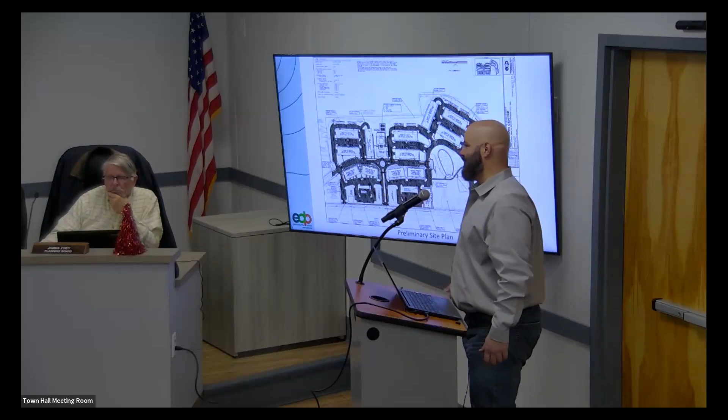I just wanted to identify one additional comment we heard earlier today related to the density on the site. We're at 507 units. We had a building identified as a 4-story building that is always going to be a 3-story building in this location, which gives us that 507. When they did the count looking at all the buildings, that would have brought us to 520. We're not intending 520, we're intending the 507. That allows this building closest to the street to be a 3-story building, bringing the mass and scale down from the 4-story buildings in the back to a 3-story building in front, consistent with the streetscape we've been providing. So just wanted to make sure that's clear and understood.

We've got a million slides, can go through whatever the town may want to see. But I know we are in the middle of a public hearing that was tabled from last evening, so if we can continue that and close that public hearing, we'd like to—if the board is ready—have the board take action on this application tonight and issue a final approval. Okay.

Does the board have any questions of Mr. Danable at this point? Ms. Biancani, do you have any comments for the board or anyone at this point?

Good evening, everyone. As Mr. Danable indicated, there's been a lot of information exchanged. The only outstanding comments—there were, I think, 3—and I'll just quickly run through them. One was the payment in lieu of recreation; there's been some back and forth with respect to that. And I believe the other change on the plans, and maybe Joe you can point it out, is that there are now pickleball courts on this site. Yes.

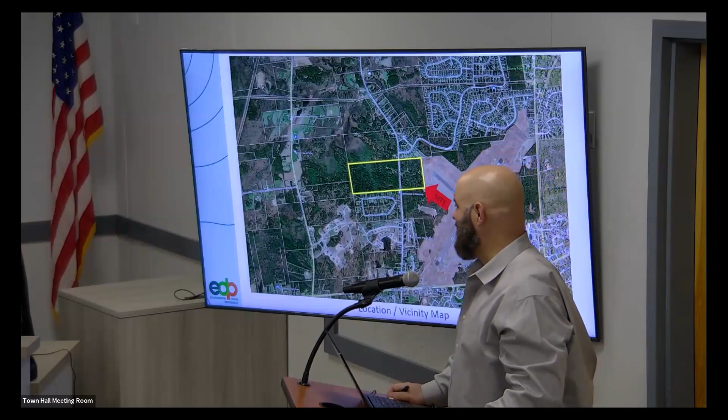We are looking to develop just the eastern side of the road located here. The western side of the road will be one of the 34 lots, and that will remain with the Cisar brothers, whose family has owned this for 50 plus years in the town of Milton.

We've obtained jurisdictional determinations from the New York State DEC for wetlands. We've obtained verification on endangered species from the New York State Department of Environmental Conservation. We've also obtained a letter of no impact or effect to cultural resources from OPRHP. In addition, we've received willingness to serve letters from Rowland's Hollow Waterworks and Heritage Springs Sewer Works.

At the last meeting, a round of comments asked us to provide engineering narratives related to the sewer and water. We have provided engineering narratives for sewer, water, and stormwater management on the site.

Again, the project itself is located on both sides of the road. The east side will be developed with 33 single-family lots plus other utility lots. The west side of the road will remain as one parcel retained by the original owners of the property.

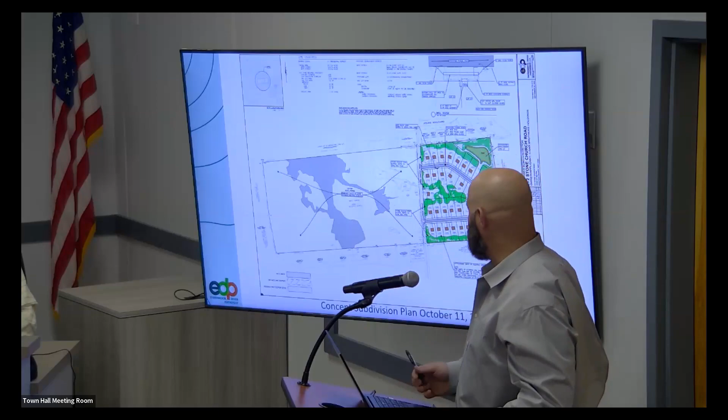Internal to the site, we have a proposed public road, Paulina Way, named after the brothers' mother, who was the original purchaser of this property. 33 lots are accessed from the public road and one access onto Stone Church Road.

We are providing a no-cut buffer or planted buffer along Stone Church Road, consistent with other subdivisions that have been approved on roads in the town of Milton.

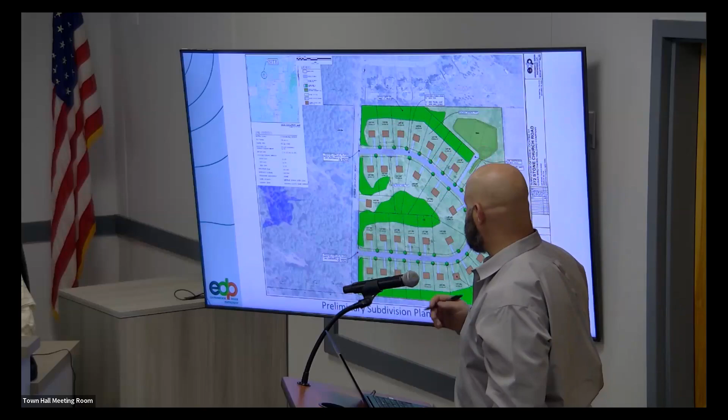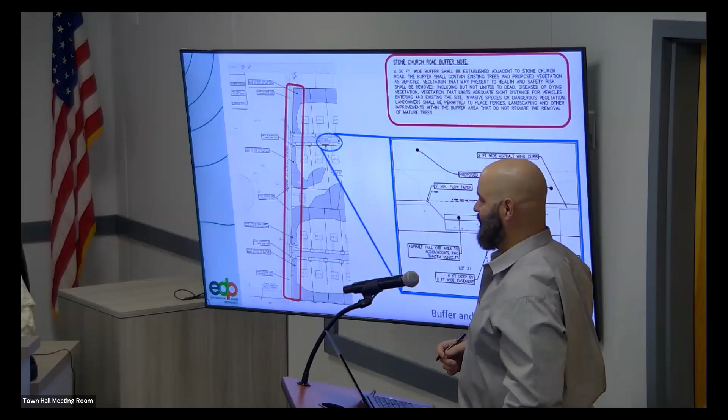We're providing a mail kiosk, with a buffer note along Stone Church Road, where we're going to maintain buffer areas where there's thin or no understory vegetation, and additional plantings will be placed. A mail kiosk located within the right of way, a pull-off, with two mail kiosk locations to provide access. This is identical to what was approved on Greenfield Avenue at 240 Greenfield Avenue for this setup.

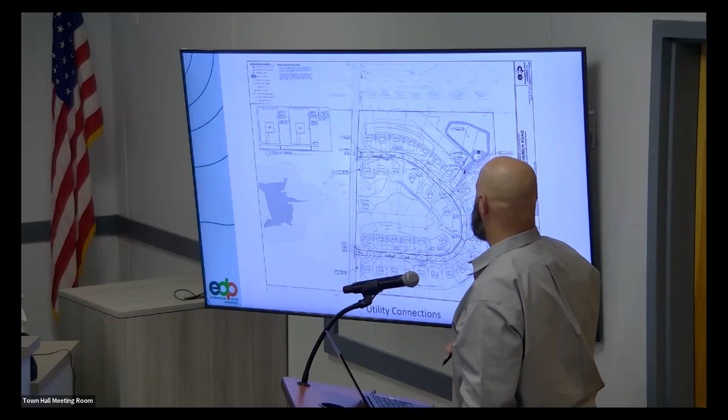The county also talked about this area here, which is within the runway protection zone, that 2-dimensional element. McFarland Johnson was the county's engineer for the airport.

No structures are allowed in the RPZ zone, and the county has the right to clear any and all vegetation obstructions at the ground level within the RPZ zone, and that is their right. I don't believe we can tell them no, we can't do that. I'm not sure the town even has the right to tell them no, they can't do that. That's within their 2-dimensional easements.

So that's why we believe that's the appropriate spot to put the stormwater management area. Now, they also had comments on the stormwater management area, they have to make sure it's not an attractant to birds and wildlife.

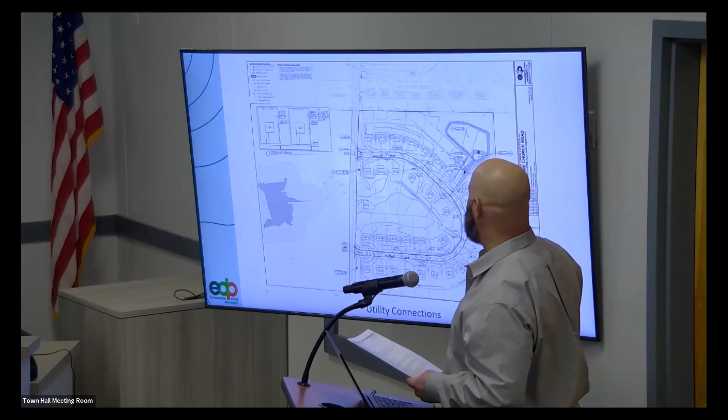The great thing about this site is we have some of the fastest infiltrating soils in the county at this location. All of these ponds, after a storm event, will be drained within 24 hours, so they won't be conducive to wildlife habitat and birds. Obviously, they're talking about bird strikes for planes flying off the runway. So we definitely wanted to provide the town with that update based upon the county recommendations we received.

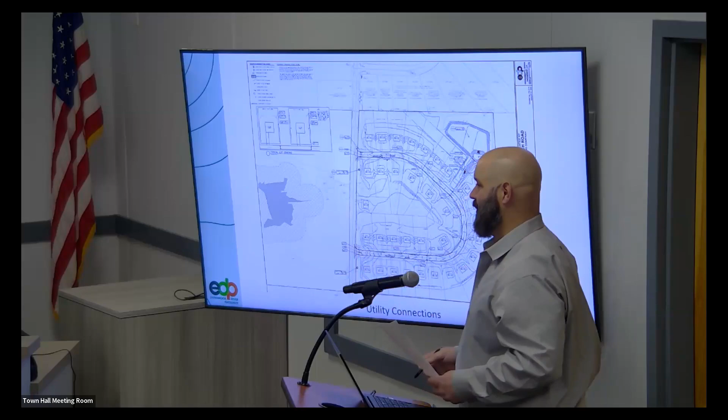Can you go, so you have trees that you're leaving there. We were proposing to leave some trees. The county has the right to come in and clear them, through an easement that they have.

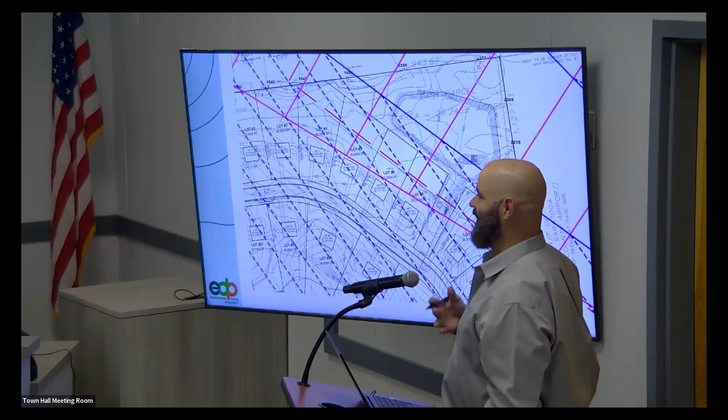Even then, those trees are going to be on those private residential lots. Correct, there's an easement. My understanding is the county airport has an easement over that land, not just here, but at the ends of all 4 runways, and has the right to do whatever is necessary within those areas. Which they obviously haven't to date. But correct.

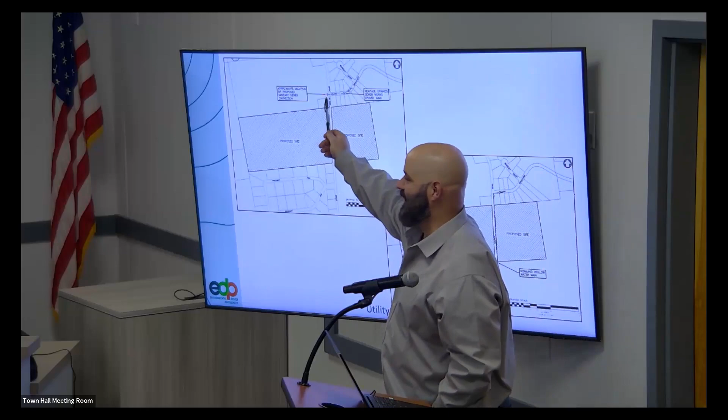So I think that's it. We had sewer, water. There's an existing Rowland water main running in front of our site. We're simply going to connect to that and loop it through our project. Sewer, there's an existing sewer main that exists as part of Athens Drive. We're going to run a force main up and tie into the manhole on the west side of the street, again in accordance with whatever sewer district and DEC standards we need to follow.

Okay. Oh, forgot about this one. Traffic - we had a traffic study done several years ago. We were looking at 100 units on this site as a part of the PUD.

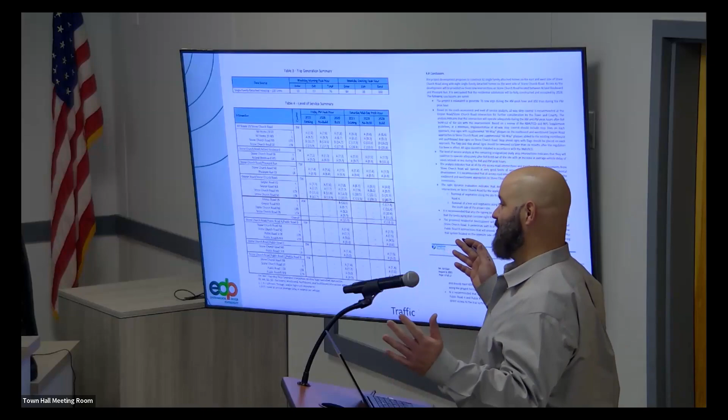The conclusions of that study recommended mitigation at the intersection of Stone Church Road and Geyser Road with the installation of a 4-way stop. So Geyser Road would become a 4-way stop. There was subsequently a county letter pursued by the town that recommended no mitigation, or that a 4-way stop was not warranted at that location - they had done an earlier study that said it wasn't.

So we have provided a supplemental study from our traffic engineer who keeps the same conclusion for the 34 lots, that a 4-way stop is recommended at that intersection, and that it is warranted today due to the high degree of right angle incidents that have occurred at that intersection. So we do have an instance where the county might not necessarily agree with the mitigation measures for this development.

The developer will put in the stop signs, or will not put in the stop signs - the developer cannot put in the stop signs if the county doesn't approve them. However, I believe the town board has the right to authorize the highway department by resolution to install those stop signs. So it's a little bit of a gray area like that.

We're willing to do the mitigation, we have no issue with it. I don't know how that's going to work out with the county. I think Sophia's already triggered that with both county planning and county DPW to say, all right, we've got to come to some consensus here. We've had our code enforcement and some of our EMS back up that that's one of our most dangerous intersections, and they're inclined to say let's go with it, but the county does control the intersection.

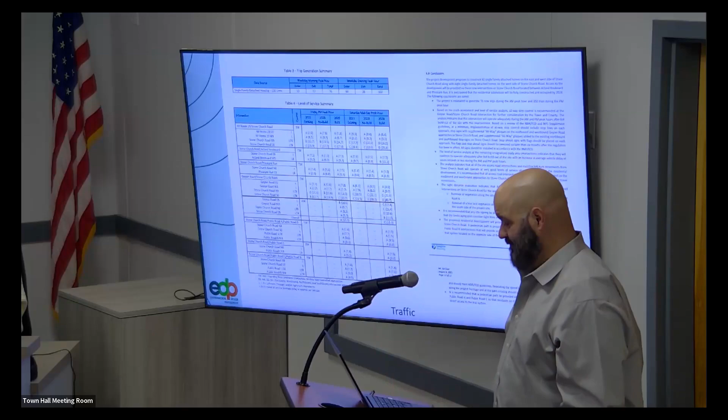Okay. Ms. Biancani and Ms. Marusa, do you guys have things you want to go over with us at this time?

Thank you. So not a lot to say in addition to what's already been said. We reviewed these plans. We did have some stormwater comments that have been addressed - they were pretty minor, this is a fairly straightforward site. We did request the details on the stormwater, the water, the sewer - that was all appropriate and accurate. Obviously this project will require all the approvals of Saratoga County and DEC and DOH.

And then the only other thing was the traffic study, and we appreciate the additional information. As the chairman indicated, Sophia has sent the traffic study to County DPW and County Planning for coordination so that we can understand what the issues are. And that was, I think, all we had.

Just to add to that, so we're waiting on that feedback. We've reached out directly to Chad Cook to get that determination. So while we're thinking about infrastructure, one of the details that came up in a discussion with our highway superintendent was with regard to maintenance and management of the mail kiosk area, especially as it pertains to the road dedication. He did express concern with including the mail kiosk and the paved surface approach area within the right of way, and expressed that he was not comfortable having that be part of the road dedication process. So it's not that the board needs to make a determination, but it is pertinent that the board be aware of the highway superintendent's comments on the project, considering if these roads will ultimately be town dedicated.

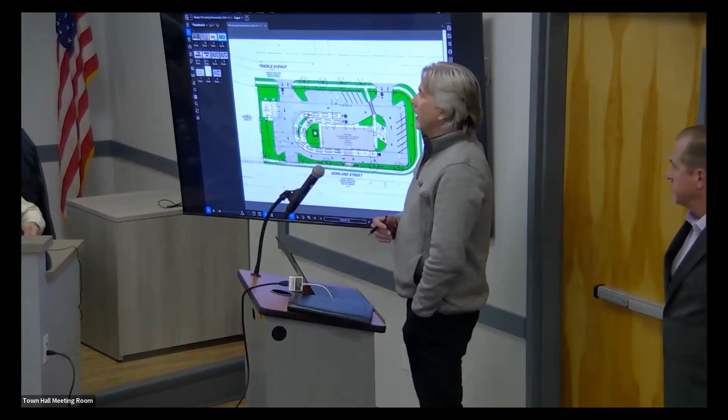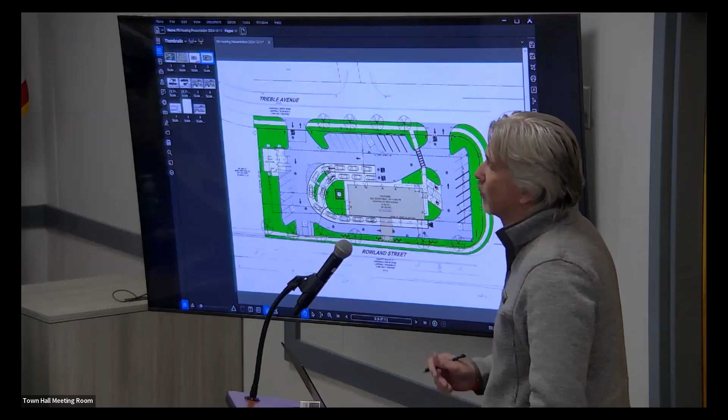Good evening, great to see you. We provided some updated figures, and this site plan is pretty much the same as it was last month—it was very preliminary last month and it's still a bit preliminary now. But we've enhanced some of the pedestrian features we discussed last month with this board, which included basically a book match to what Dunkin' did, with almost 360-degree pedestrian sidewalks, with a connection from the front of the McDonald's, which is now on this side of the building, connecting it to that sidewalk around the property as well.

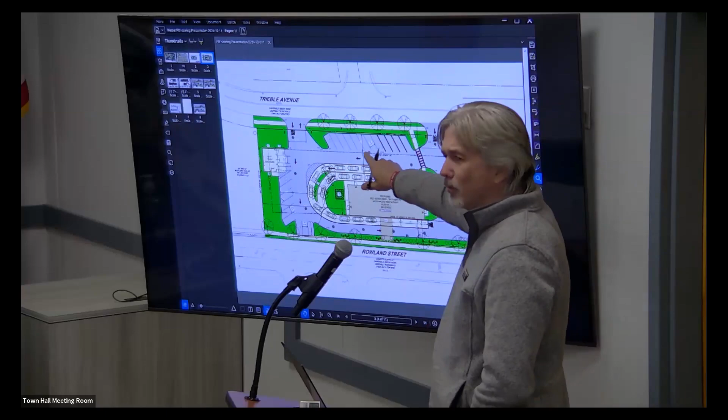I know there's a couple comments in staff's review. We need to get our drive aisle up to 21 feet—I think it's 2.5 feet short. When we get our full design drawings together, we can avoid that variance. At 21 feet, right, that's the minimum. Yeah, I think I can find that 2.5 feet or so somewhere in there and get it up to 21 feet and avoid that issue.

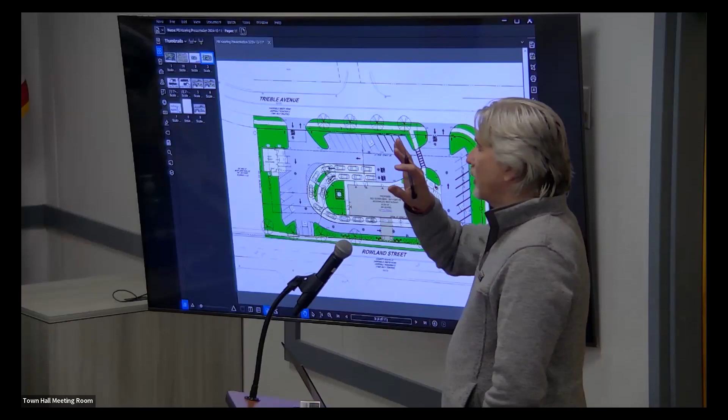So based on what we heard last month and these changes, I think we're kind of set with the site plan. I was going to jump to the architecture because I think that had a little bit more discussion needed, if that makes sense.

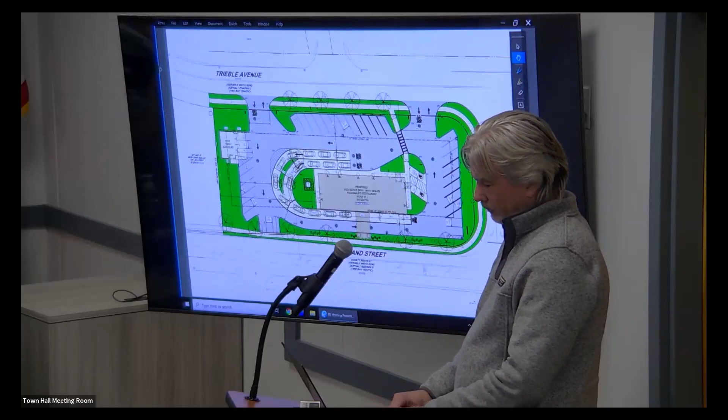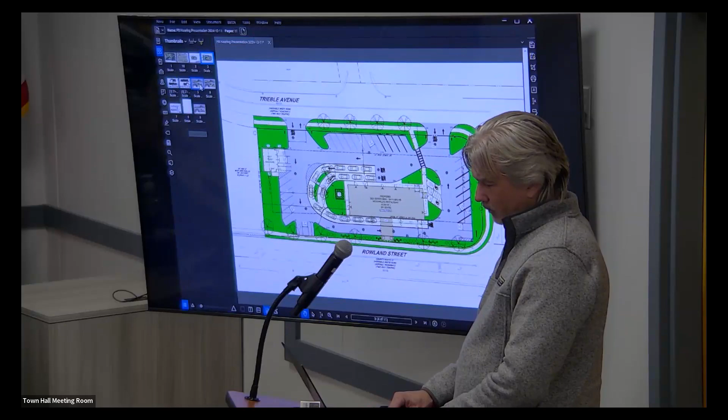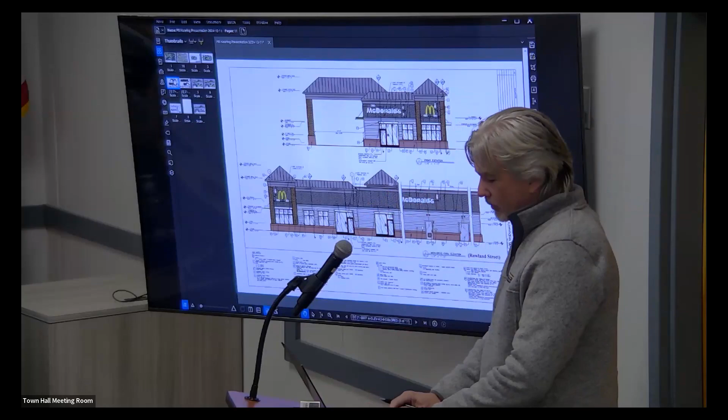In your packets was two-dimensional elevations that we prepared based on board feedback. I'll just jump to the 3D since those are a little bit easier to understand and follow. These weren't ready by the time we made the submission, but obviously we want to show them to you tonight. This gives you a sense, and the views are labeled.

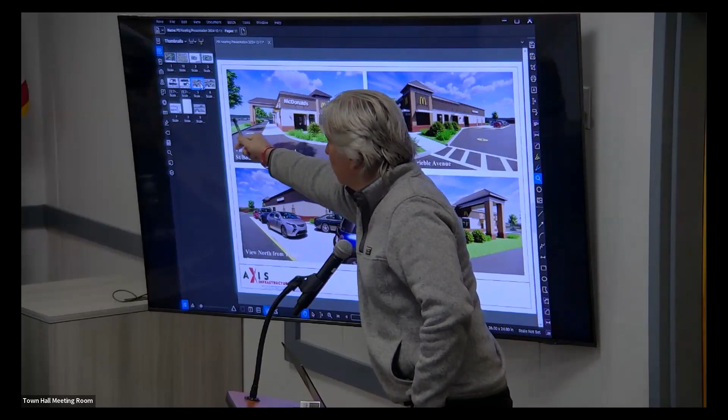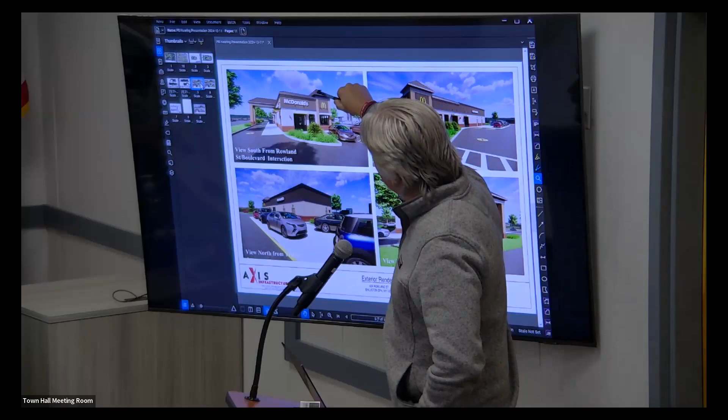So if I'm coming in up the boulevard and off of Rowland, looking down Rowland—this would be Rowland over here—you can see we've added the gable over the top of the cover over the drive-through area, again matching that Dunkin' Donuts next door to us, and provided in the front of the building kind of this architectural feature to really show this is the front of the building and this is where the entrance to McDonald's is, to try to capture that.

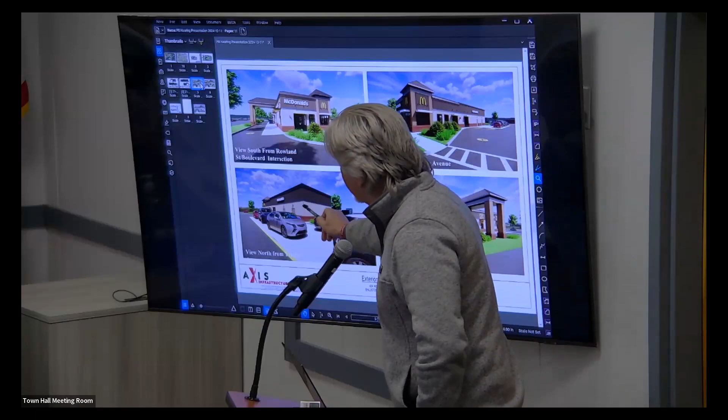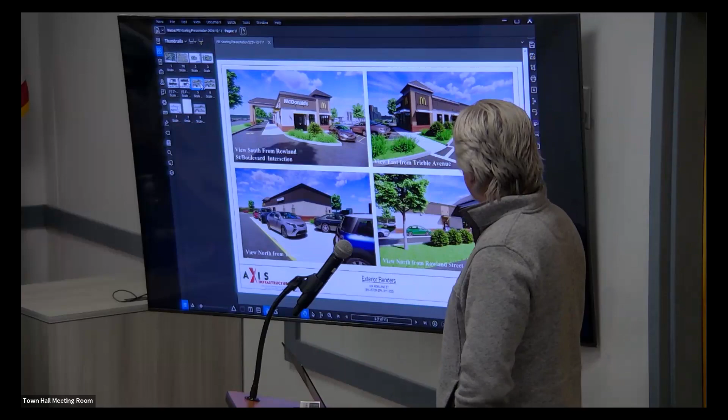Flipping around now, this is if I'm up at the Boulevard and Trieble, in that corner, looking east towards the building—it gives you the sense, here's the non-drive-through side of the building. Basically Hannaford would be over here, and down around here you're entering the drive-through. Dunkin' is basically down here. This is looking up Rowland Street to give you a sense of that view with the drive-through canopy and that gable on the front end, really making it a feature of the building.

We tried to hear you the best we can and capture a lot of the architectural features that you wanted in this building, and I'd like to think we have. I guess that's why we're here, to get this feedback tonight.

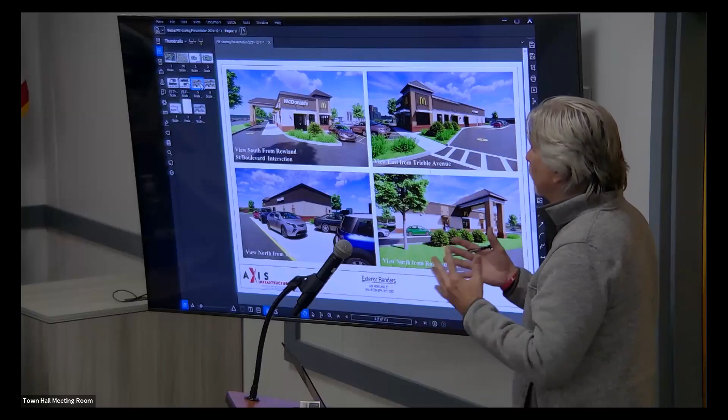We know there's much engineering comments to address. Our goal early on was to get the big picture items set, architecture and layout, and then we'll dive into stormwater pipes and all the nitty gritty of the project.

Ms. Marissa, do you have any comments? I had a quick question before I moved on, which is what is the height at the top of the canopy for the drive? The scale of the Rowland Street view north makes it look very large, but I can't tell if it's a matter of perspective. If we can clarify the dimension, that's great.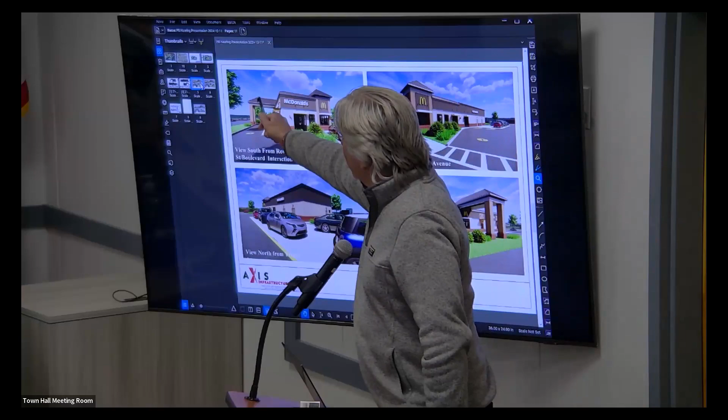You're saying, what's the top to there? Yeah. We're about 19 to the top of the parapet, so it's probably another 3 feet. I'd have to confirm it, but you're probably in that 22-ish range, 23.

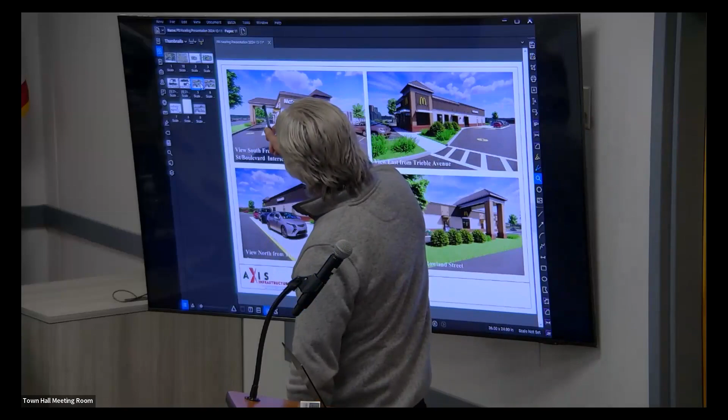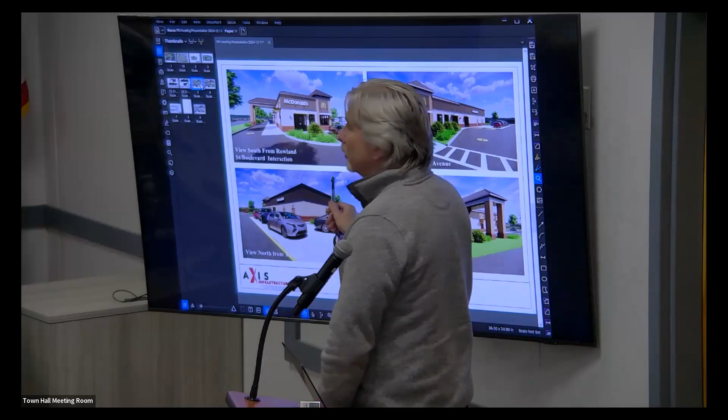So that ties into the parapet, because in the rendering you sent us, it was more of a flat roof. Well, that was the prior one. We have, around the canopy, around the front of the building and everything, that kind of mix of a real gable and a faux gable. On the backside of the building, we still have that flat, but we've enhanced the parapet with this detail here to avoid that flat roof look as much as possible.

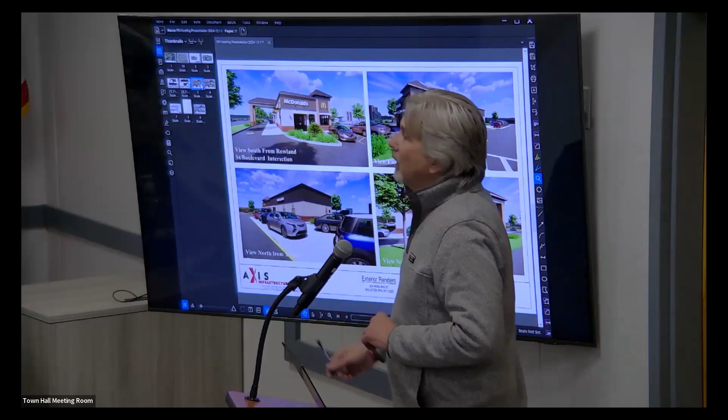Yes. Okay, all right. Anything else?

Thank you, Steve, for working with us through these renderings. I appreciate the fact that we've been able to coordinate offline and you're taking in comments from various parties. So we appreciate that, and hopefully we can get some clarity going forward tonight.

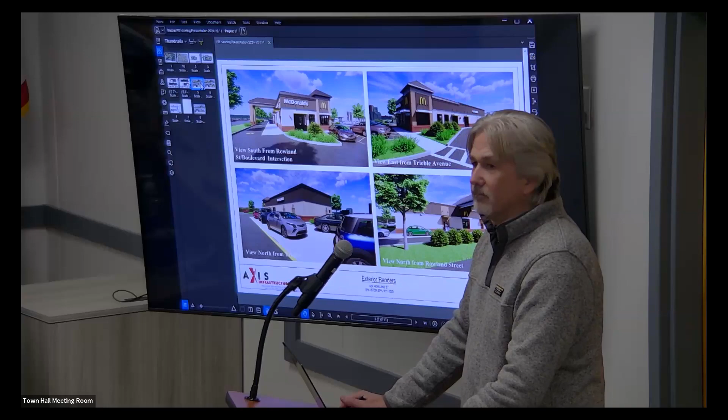To the same end that my initial review had stated, I think it's critical for the board to continue to assess the architecture of the building, to continue to make the asks and enhancements that they see required on this site in accordance with the town center guidelines at this time, and to really firm up the aesthetic review of the building.

Obviously, we addressed the proposed layout last meeting, we had looked at the alternatives, and I think that aside from the potential spatial variances that we might have to deal with, the layout itself looks like it's definitely far more pedestrian oriented.

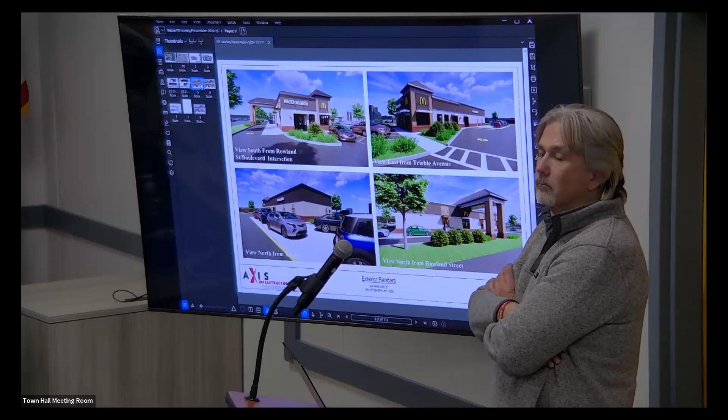The only thing I had a question about, and it could be a matter of engineering review, is if we can go to the site layout. I don't know from a traffic circulation perspective, if it makes sense to think about the entrance closest to the boulevard to Rowland. If in some way restricting turns there might help improve circulation of the site for those bypassing around and coming off of the Trieble Avenue southern entrance, where they have to hop into the kiosk by looping around the building. I don't know if there's any way that by regulating movement on site we could improve that, but obviously it has to still support adequate access and circulation.

It's just something I was trying to test drive this site and we were trying to anticipate the turn. So I just didn't know if that was something for us to look at a little bit more closely.

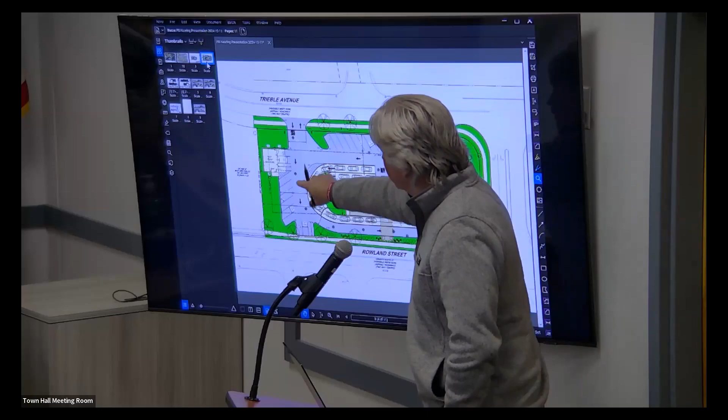Yeah, I guess, from a pedestrian standpoint, right now we have one-way traffic flow counterclockwise around the site. The driveways are two-way, but once you enter the site it's basically one-way, which I feel is the safest when it comes to pedestrian movement on site. We don't have traffic going like this on site.

So if you're driving through the site, if you're on the north entrance, which is closest to Steve, and you come in and don't want to go through the drive-through, you're really going to park in those parking spaces on the west side of the site. Then you're going to walk in the main entrance, which is essentially that face of the building, before you get to the drive-throughs.

Given the size of this site and the building dimensions, and looking at one of the comments you guys will see, we had concerns regarding the turning radiuses through the 2 lanes of the drive-through.

What's shown is sort of the industry standard. The interior depth of that curve is 10 feet, the exterior is 12. That's pretty typical.

One thing I like about how this plan has worked out is that the ordering kiosks are now pulled more to the extreme end of the curve radius, which causes a lot less conflict, less issues. If anybody drives one of those massive giant trucks, getting through one of these without having to back up is an issue.

The aisle width, the reason we brought that up, other than the 21 feet being required by code, is this is one-way traffic. The code with 60-degree parking is assuming one-way traffic for the 21-foot aisle width. But that's kind of part of this, right?

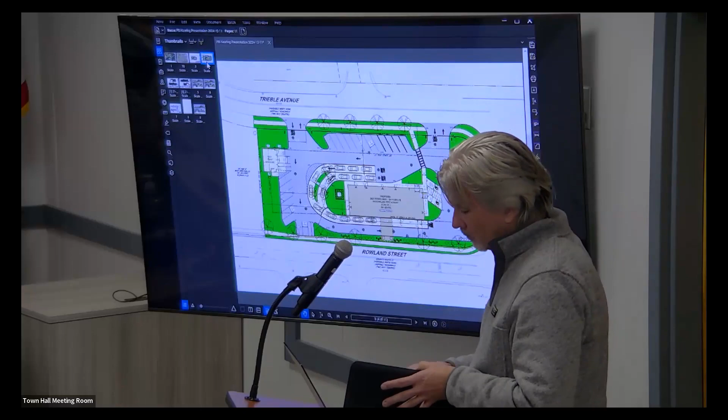The only other thing, at some point, I know you have a lot of engineering details to do, is to show that emergency access. I think the presumption is an emergency vehicle would be entering one of the two site entrances, but then where that arrow is on the west side, it would stop there, and that would be the point of access for emergency to the site. But that's a detail we do need to go through.

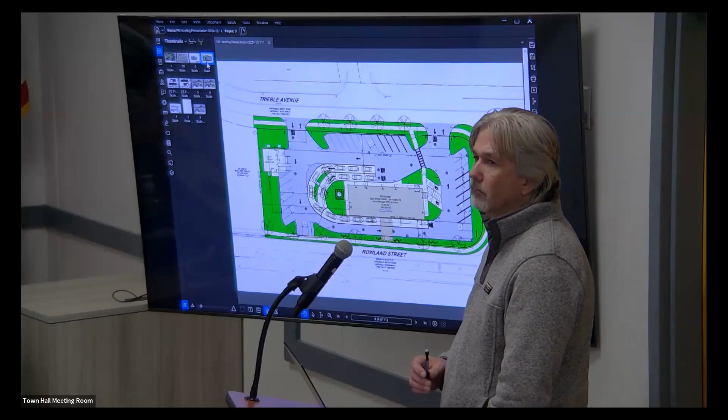Other than that, that really covers our comments, other than, as you said, this is really preliminary. This was just to nail down the site layout, and then there's a lot of engineering details required.

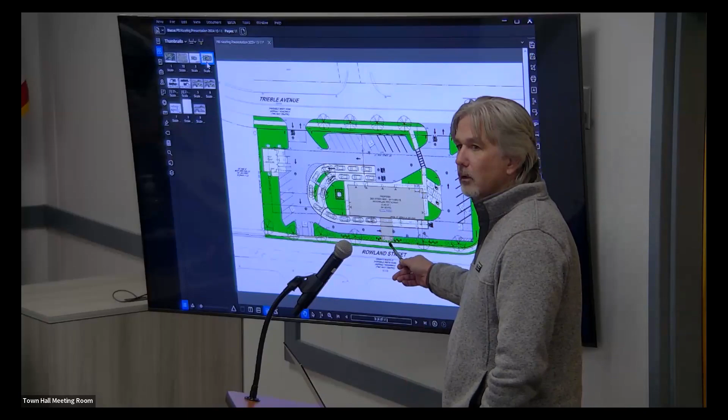The only thing I didn't understand in your comment on the variances, the setback to the street, I thought we were avoiding that issue with the canopy. We brought it right up to the street line. I think I might not have had the benefit of the print of the layout. I got you. Okay, so I can easily rectify that with updated plans.

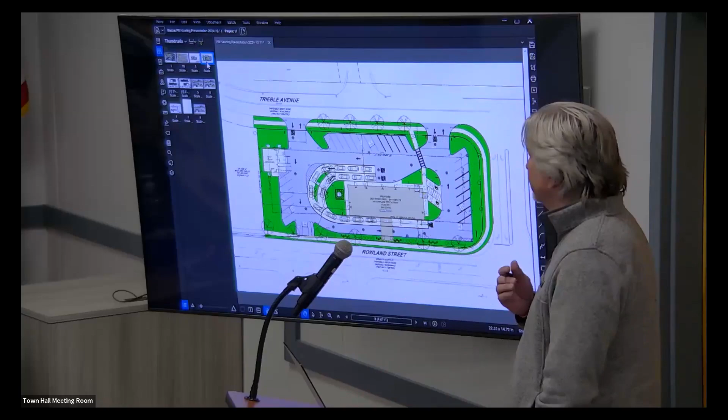I thank you, I know you put a lot of effort to try to get it closer to where I think this board would be thinking. The only thought I have still, and I understand that's a parapet on the rear and the other side, I think that would be the west side a little bit. I thought last time when we discussed it, it was more to keep the cohesiveness of the faux gable, and I thought that would have extended on the rear of the building and the other side, because I'm looking at this as a 360 sort of building—you're going to see every side of it. I do appreciate that the gable by the drive-through windows is there, so I just think it would help with cohesiveness. I know McDonald's is going for more of a modern style, however our town is very traditional in appearance in the downtown center. So that might be one of my requests. I don't know how the board feels on it, but I think it would get it that much closer to what our community is used to. So thanks.

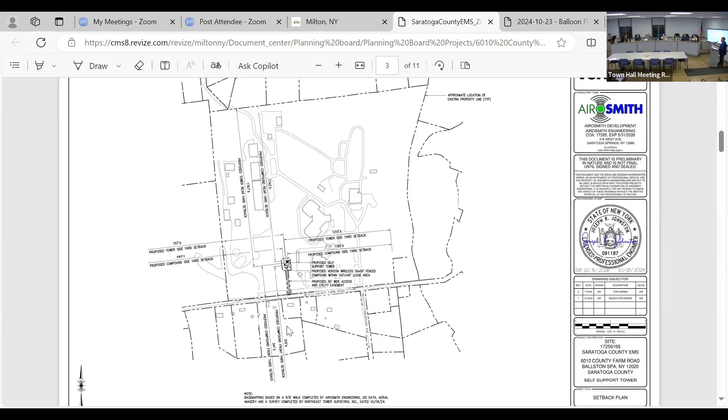We're going to do a SEQR motion that will become lead agency on this eventually. But what that'll require, I think Bill, is when will this go to the ZBA? Is it on their meeting?

Yes, this month. So when we meet in January, we would have to make a determination of significance before they could have their hearing and make their decision. All right, so we've got time for that.

So what I'm going to do tonight is list this as an unlisted action, declaring planning board as the lead agency on this, if that's okay.

I will entertain a motion that the Town of Milton Planning Board classify this project as an unlisted action pursuant to the State Environmental Quality Review Act, and that the planning board wishes to declare itself as lead agency pursuant to SEQR.

Mr. Chairman, I so move. Second? I second. Okay, great. So who was that? It was Maren. Her first official second. Congratulations, maybe next time you can make motions. All right, I'm kidding. So with that, any discussion?

Please poll the board. Mr. Marsicano? Yes. Ms. Van Denza? Yes. Mr. Whittle? Yes. Mr. Fry? Yes. Ms. Marin? Yes. Chairman Barto? Yes. Okay, keep us posted.

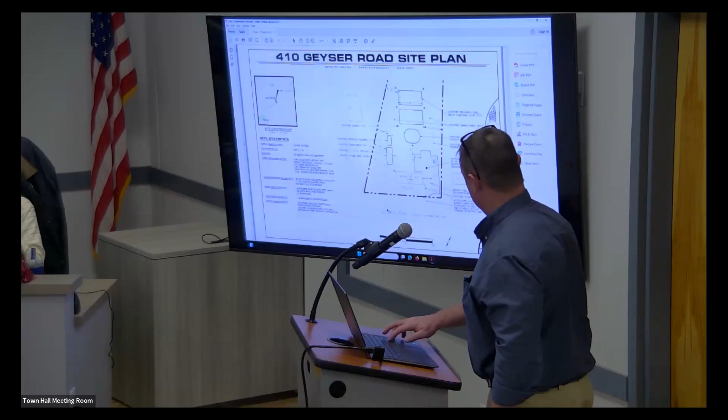My name is Jason Dell. I'm an engineer with Lansing Engineering.

Just going to go over the features of the site plan. This project site is at 410 Geyser Road, and the entire project site is approximately 1.8 acres. There's an existing single family house located at the frontage of Geyser Road, which will be repurposed for the uses that Jen had indicated.

Access into the facility will be via the existing driveway that's there. That will be improved, come around and wrap around to the parking area that will be located along the eastern side.

Moving up through the site, we've got an outdoor gaming area in the center, and then we've got two regulation-sized volleyball courts, as well as other amenity spaces with a pergola and picnic tables. So to Jenna's point, this will be a recreational facility along with what's going to go on inside the building as well.

For this project, they will be extending a new water service into the building from the municipal water main that's along Geyser Road. And they will be rebuilding and upsizing the septic system for sanitary sewer.